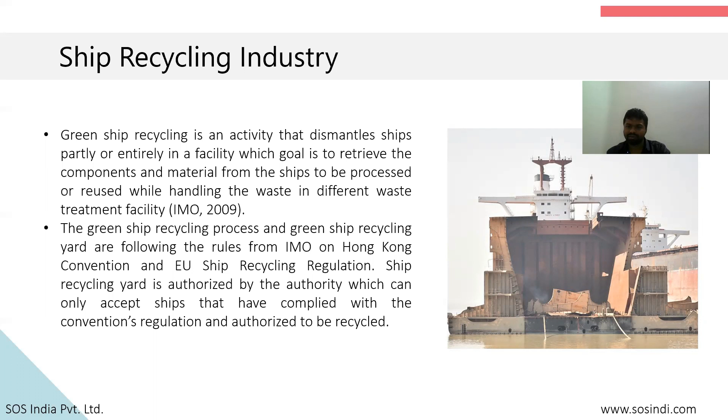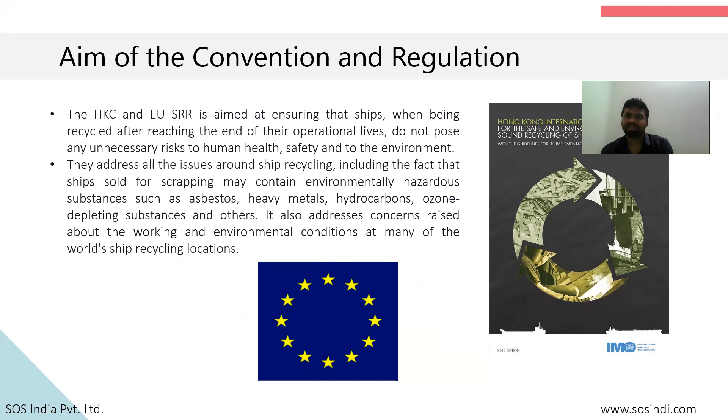Next we shall see is the aim of the HKC and EUSRR. In ship recycling industry, these two ensure that the ship being recycled does not pose any risk to the human and environment. They basically address all the issues around ship recycling, like hazardous material present on board, like asbestos, PCB, heavy metals, and so on.

The next one which we shall see is how to reduce human and environmental impact with respect to ship recycling. So usually ship breaking is a really difficult process because of the structural complexity of the ship. Here, most of the laborers are working without a proper PPE kit or with heavy machinery work, which may pose danger if it is not properly managed.

Further, there may be release of any hazardous waste into the environment or to humans, like oil spills, asbestos, toxic paints, and so on. So, when these issues are properly managed, then the ship recycling will not pose any danger to human health and also the environment.

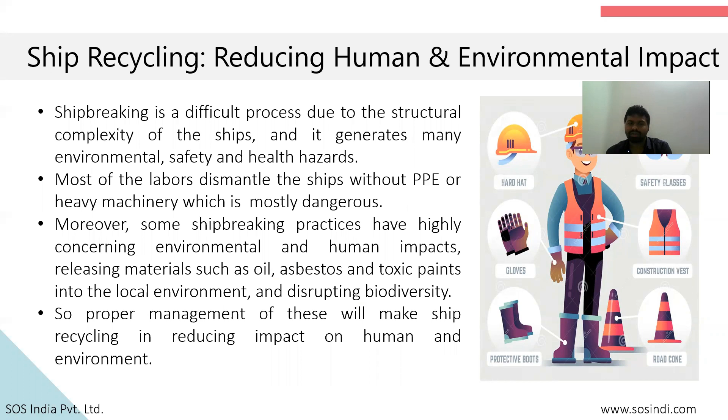Next we shall see is the hazards associated with the ship recycling industry. Here ships coming to recycling can have various toxic materials on board, which is to be properly located, removed, and disposed of. Firstly, the hazards associated with the workers with no proper PPE. Next is badly monitored work, explosions, and all other work-related accidents. Finally, the hazardous material which is coming along on board the ship.

These hazards may cause human and environmental damage.

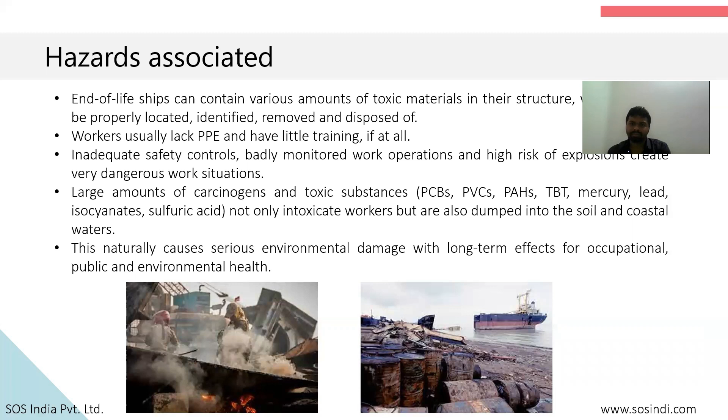Now let us see the training session for worker safety. As you all know, currently India is the world leader in ship recycling. Despite being improved, the working condition, worker safety, and environmental protection is still at a lower rate. With the help of the HKC or EUSRR, the ship recycling yard is gearing up to enhance the worker safety and also the environment.

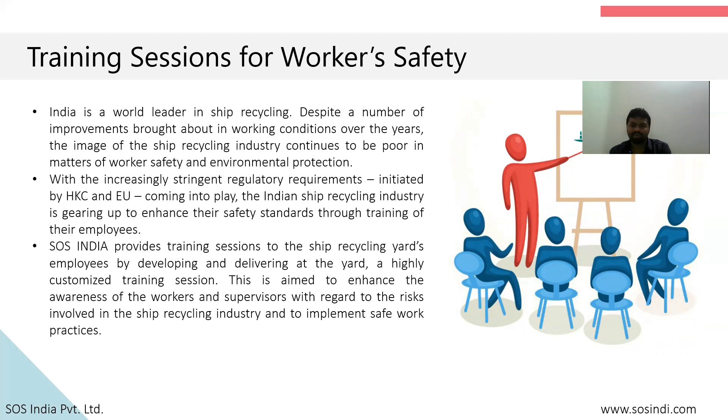So we at S.O.S India provide our service in conducting training sessions relating to ship recycling. We offer it to the employees by developing and delivering it directly in the yard. This is aimed to enhance the awareness of the workers and supervisors relating to the risk and hazards involved in ship recycling, and this also implements safe work practice.

Next is the benefits of the workers training. First is to educate the employees on the basics of health and safety, and the next will be for the employees to work with increased focus on their task, then to increase the job pleasure and confidence among employees, then to increase the effectiveness and gradually have an economical gain for the organization, then to increase the ability to adopt new skills and methods.

Next is to raise the company's image, and then proper risk management should be followed. Finally, increase the productivity with self-satisfaction among the employees. So these are the benefits of the workers training.

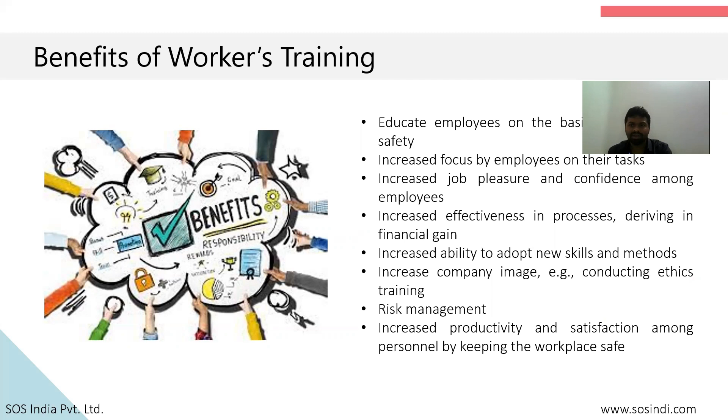So the topics which we cover in these training sessions, as you can see, these are the training sessions which we shall cover: IHM Awareness Training, General Safety Induction, Fire Protection and Prevention, and so on. These are a total of 13 topics.

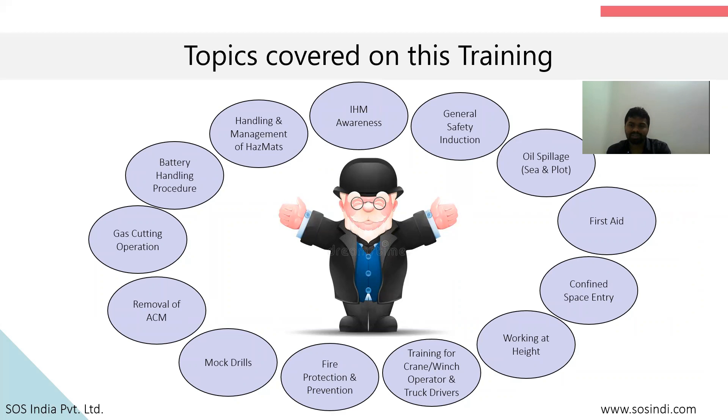So from the next slide, we will be seeing what are the training courses which shall be offered by our organization. So the first one is the IHM Awareness Training. In this course, we will be studying what is IHM, that is, inventory of hazardous material. So this is the inventory which contains the list of hazardous material like asbestos, PCB, ODS, heavy metals, and so on. These hazardous materials may be present on board the ship. It also details the location and exact quantity of the hazardous material present on board the ship.

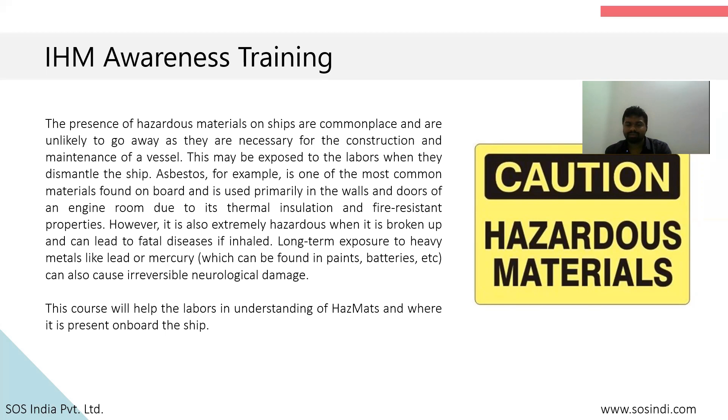So the next one is the general safety induction training. This training course covers all the inherent hazards associated with the ship recycling industry. This training is conducted to welcome all the new employees to the company's policy and to prepare them for their respective roles. This can also be given to old employees to refresh their knowledge. So this training course serves as a starting point for the organization to introduce the culture of safety in the workplace.

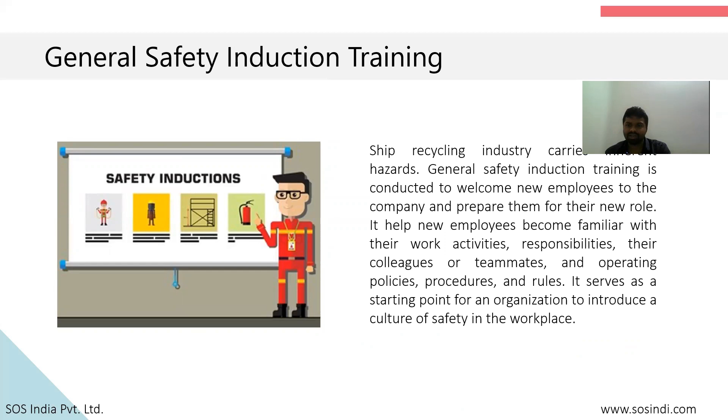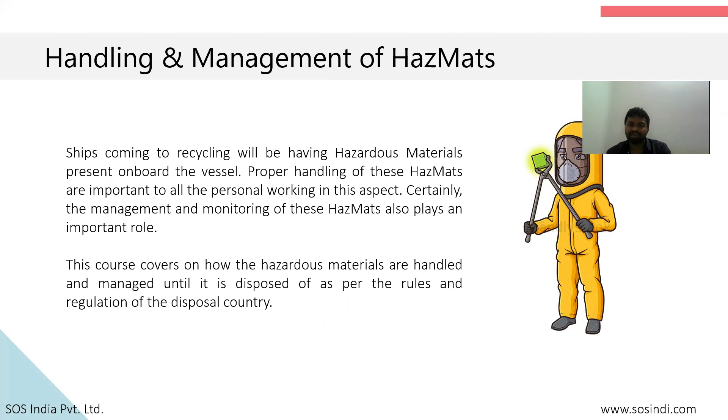So the next is the handling and management of hazmat. Hazmat in the sense hazardous material. As I said before, the ship may contain many hazardous materials on board. So the workers should have a basic knowledge on how to handle and manage the hazardous material in a safe manner.

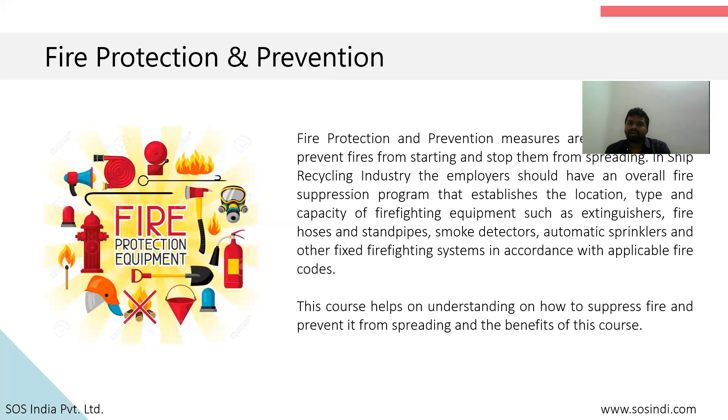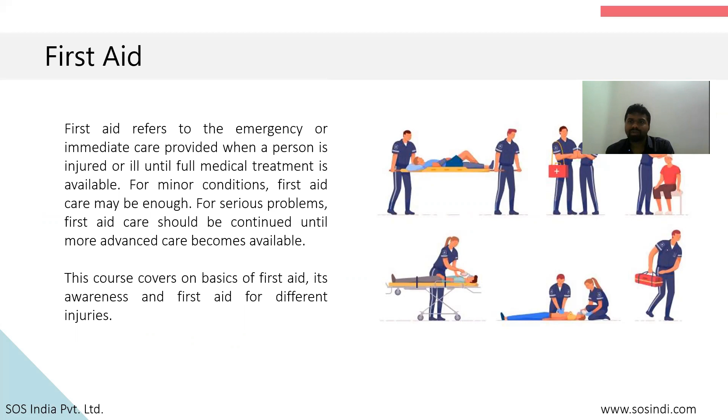So next will be the fire protection and prevention. In the ship recycling industry, the workers should know how to suppress fire and should have a basic knowledge on how to use the firefighting devices like fire detectors, sprinklers, fire extinguishers, and so on. So the next is the first aid course, which will help the workers on how to give first aid treatment in case of any emergency situation.

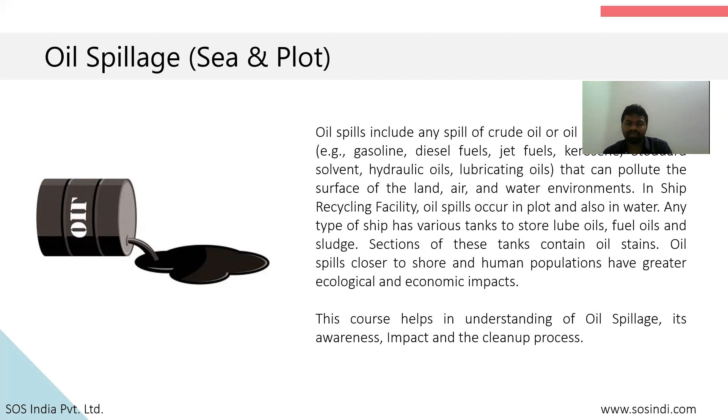And the next is oil spill, which can occur on sea or the plot. This course covers how oil spills occur and how to clean them. As you all know, ships carry oils, and oil spills are really dangerous to humans and the environment. So clearing of oil spills is a very important task which is to be followed.

Then what we will cover is the gas cutting operation, which is mostly used in the ship recycling industry. This operation contains many risks and hazards associated with it. So the workers should have a basic knowledge on gas cutting and also grinding operations, and even the safety precautions which are to be followed during gas cutting and grinding.

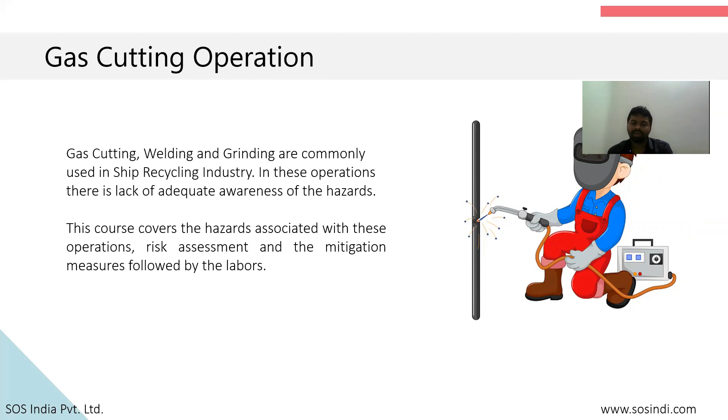So the next course is also widely used in the ship recycling industry, which is working at height. You are all aware that ships are bigger in size, so the workers shall also work at some height. We shall cover the risks associated with working at height and how to prevent falling.

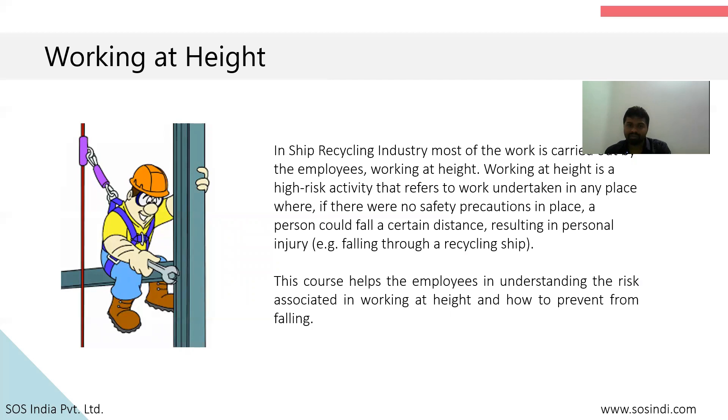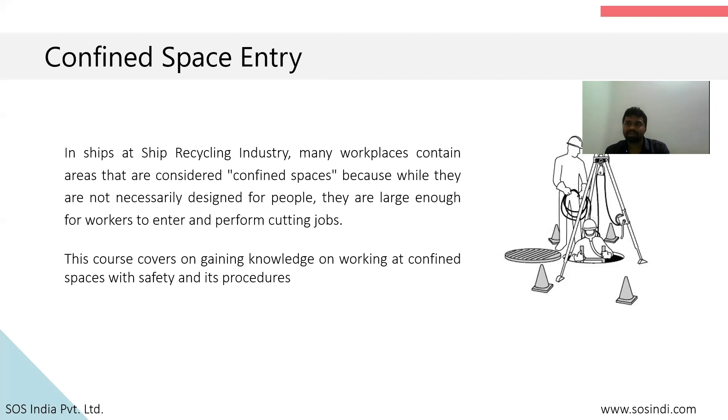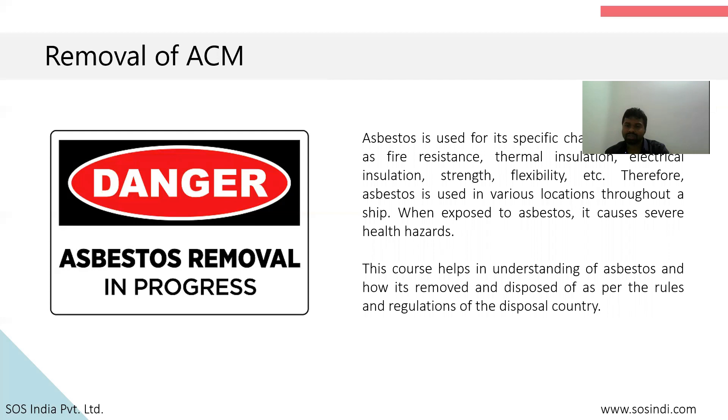The next is the removal of ACM, which is asbestos containing material. In ships, some of the insulations, gaskets, packing, and so on may contain asbestos, which is dangerous for human health and the environment. Asbestos is used in these products because of its fire resistance, electrical insulation, strength, and flexibility properties. So this course describes the safe removal and disposal of asbestos containing material as per the rules and regulations of the disposal country.

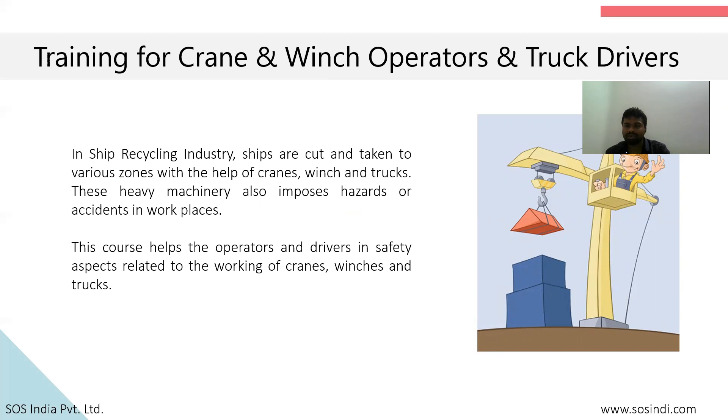So the next is, in the ship recycling industry, heavy machineries also play a vital role in carrying the dismantled ship blocks, such as cranes, winches, and trucks. So this course covers how the workers operate these heavy machineries with no accidents.

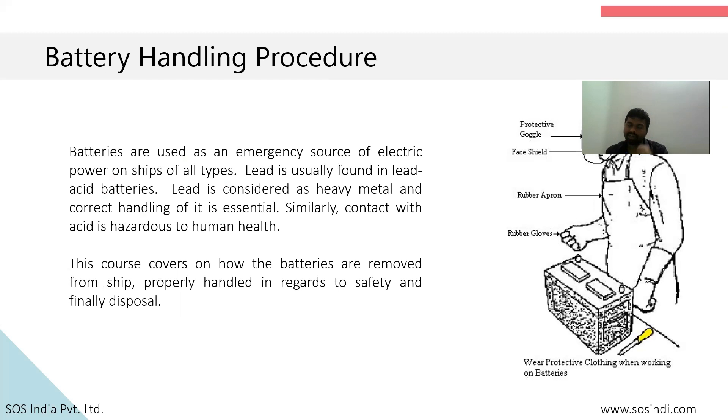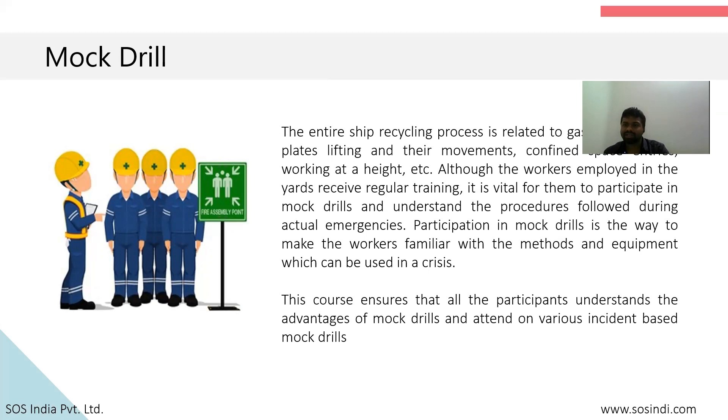As you have all seen the intro to all the courses which we are offering, our clients can choose their courses according to their employees' needs, and you can also request any other customized training courses in future.

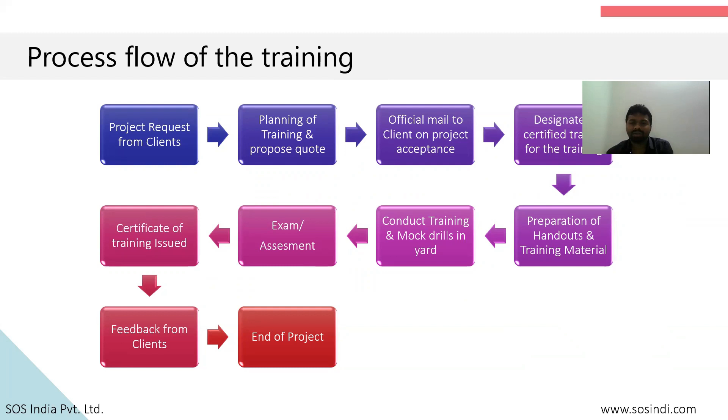So employees will also be given some time to share their experience on how they face work-related risk. Finally, the project ends with the customer feedback.

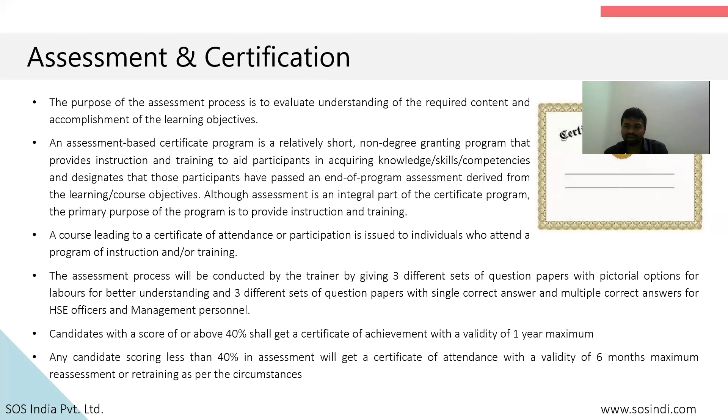So the examination is conducted in 3 sets of question papers with multiple choice options. So for laborers, it will be in a pictorial format, which is really easy for them to understand. So any participant scoring above 40% shall get a certificate of achievement, which is valid for 1 year max, and a participant scoring less than 40% shall get a certificate of attendance, which is valid for 6 months max.

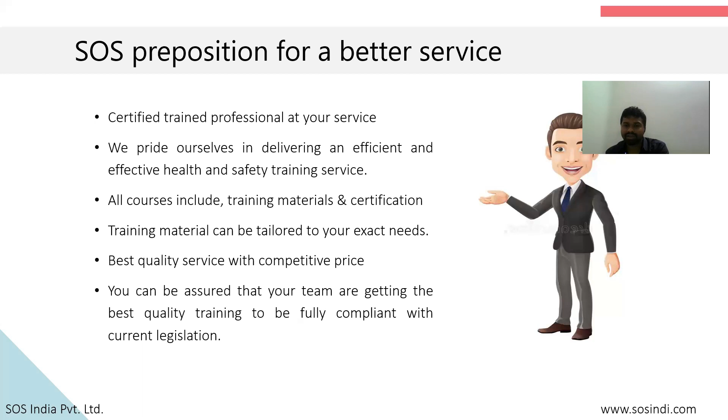So now we will see our proposition for a better service. So a certified trainer will be at your service. We provide you efficient and effective training services. All courses include training materials and certification. So we can also customize the training material as per the client's need. We offer our service at a very competitive price. You can be assured that your team is getting the best quality training as per the compliance.